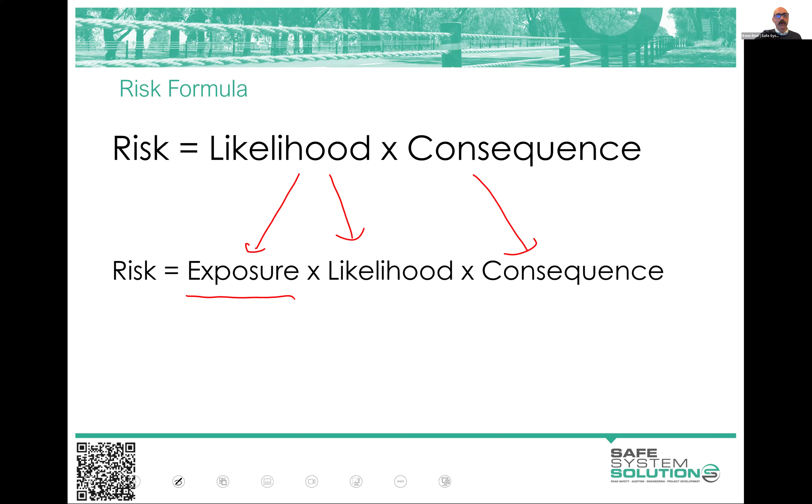But in this safe system assessment methodology, which is to a degree a particular risk assessment methodology, it's the extraction of exposure out, and then likelihood, and then severity or consequence. So how many people are exposed to a particular crash type? What's the chance that crash type actually transpires? And what's the severity of injury we expect associated with that?

So really a safe system assessment, a big component of it is doing some quantitative analysis of exposure and likelihood and severity, and then multiplying them out.

When we start to think about treatments we could put into the road and roadside environment or the street environment to alter some of these things, exposure is about changing the number of people exposed to a certain crash type. It could be restricting the number of vehicles that can go through an area, changing the number of people crossing at a crossing point, or whatever it is like that.

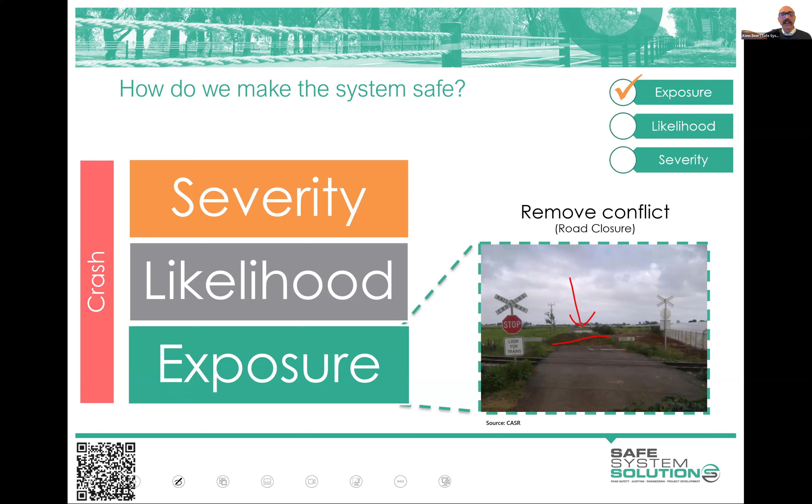You can see this one I showed, there was a level crossing, which has a mound of dirt and a road closed sign on the other side. That's eliminated the exposure to that crash. The separation of vulnerable road users from vehicles changes or removes the exposure to crashes with vehicles.

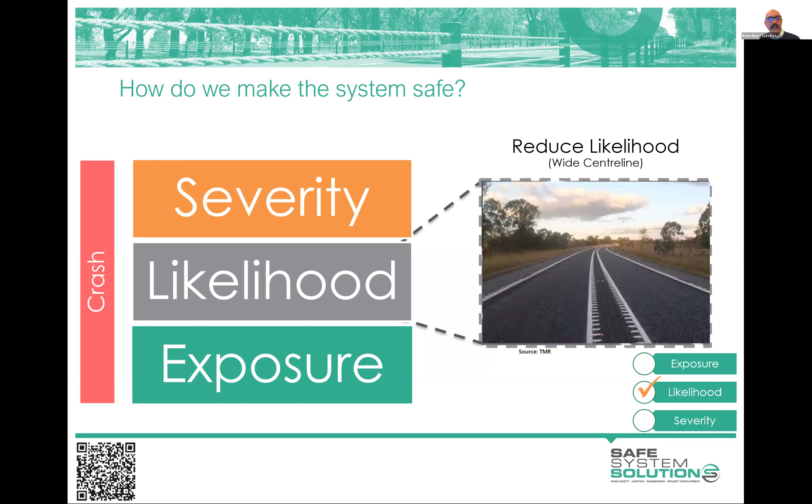The likelihood - things that reduce the likelihood, we've been doing many of those for a long time in road safety. Those are things like the geometric alignment of a road, the presence of signs and lines to warn and inform and guide, the surface we provide, sealed shoulders, tactile edge lines, lighting, all those sort of things. They're trying to reduce the chance a crash happens.

Traffic signals in their own right are a likelihood reducing factor. So we know that you can still crash at high speed - people go through signalized intersections at high speeds with some pretty harsh angles, and we see the crashes happen.

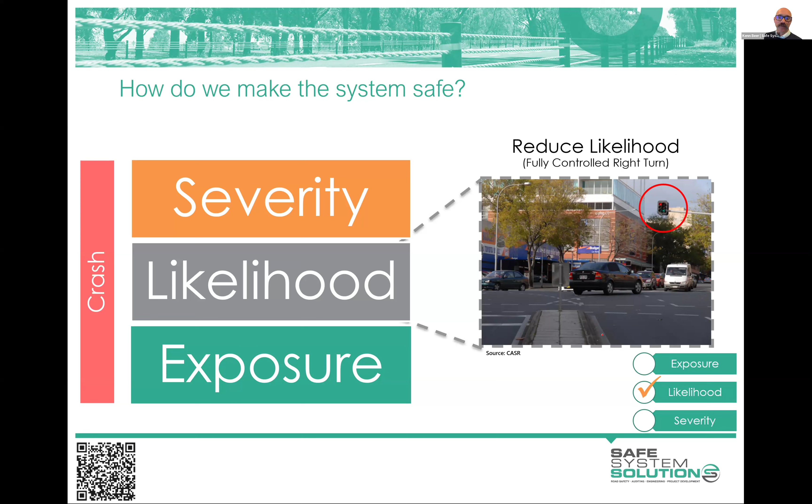The severity of crash can be altered by a fairly small handful of things. We've got the speed, we've got the levels of protection that are provided. So is it a vehicle - do they have crumple zones and the like - or is it a vulnerable road user who's less protected? Have we got padding and helmets and those sort of things? What's the angle the two vehicles crash at? So those are a few of the key things there.

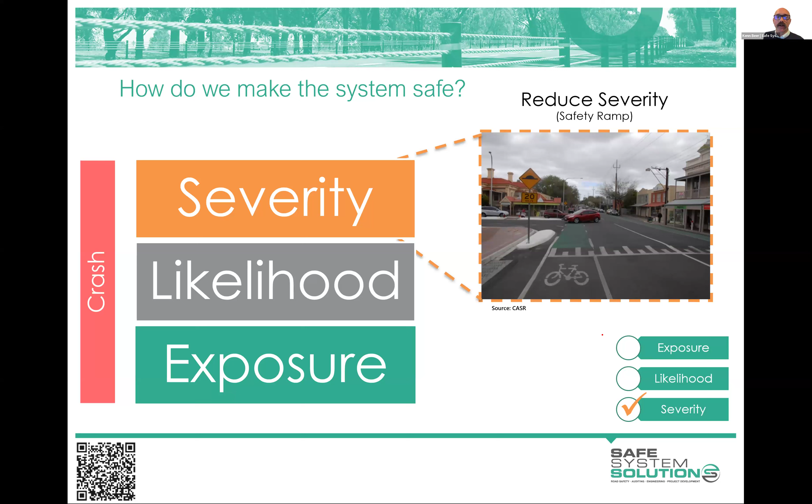Slowing vehicles at conflict points, improving angles - those are things that can alter the severity. And also thinking about how energy is dissipated in a crash or managed in a crash. A barrier system - it is a crash when you hit a barrier system, but the energy is dissipated as the vehicle slides along the system. That slow dissipation of energy is where we get these reductions in the severity.

But we add the barrier system in the middle, they're more likely to hit it. But the thing is the severity of any incident comes down so significantly, because that head-on is such a violent crash, and it's so likely to result in serious or fatal outcomes.

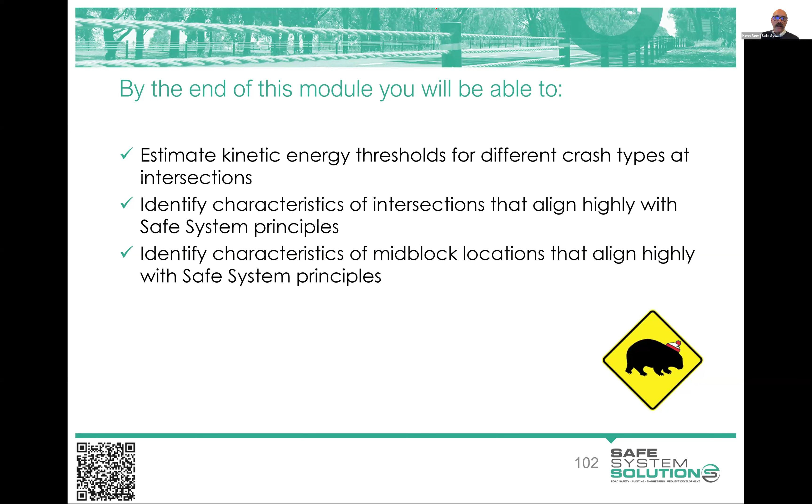Now, it's interesting when you analyze risk on a road network, there's quite a few tools you could use to do that, and safe system assessments are one of those. They have a particular purpose, but there are some more complicated tools - there's ANRAM, AusRAP, IRAP, IRR. You may have heard of some of those, you may not have, that's okay. They are essentially methodologies where you put inputs in and it spits out a risk score.

When you look at a length of road, usually, and this works either urban or rural, what you'll find is, if I draw over the top of this - if we've got risk here, and then we've got chainage here, so like length along a road - what you discover is that risk sort of bubbles along and then spikes. And of course, those spikes are the intersections.

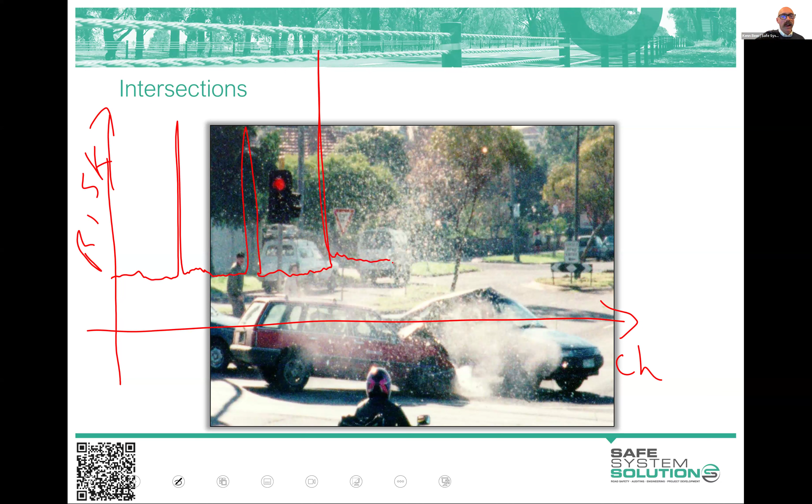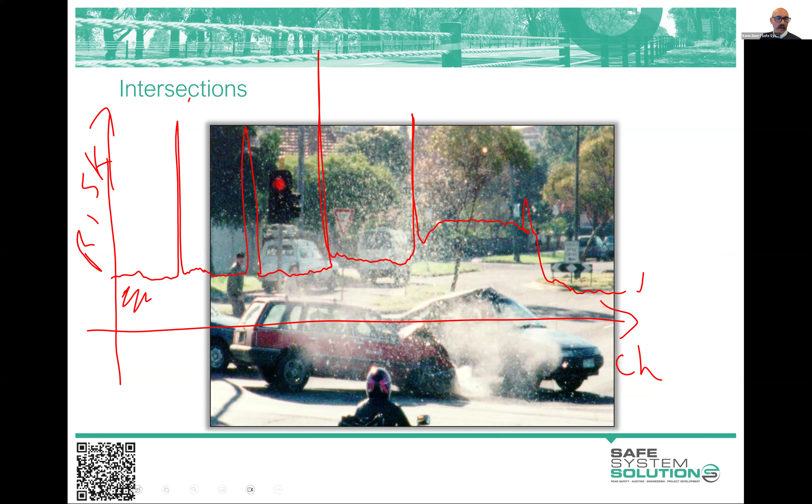And then, sometimes mid-blocks have worse characteristics. Sometimes things get better. But there's an underlying inherent risk, and we're going to talk about that a little bit later, of what we can do about that. But then these intersections spike as our points of highest risk on the network, but they're only at these isolated points.

So most people, when they think of that, they think just of this crash type that is happening. But actually, we see quite a variety of crash types at intersections. And then there's this interesting spot where, of course, in urban areas and some rural areas, we have pedestrians having to cross. So we've added that into the mix. We've got cyclists who are trying to get through there as well, and that adds a complexity.

But one that some people aren't quite aware of is that at a lot of intersections, we place point source hazards - either signals, signal pedestals, power poles. So we're running a power line along a road that has to turn down the road, well, the power pole then goes right at the intersection and the corner there. We have drainage culverts because water needs to get across this road that it's come across. So all of those present what we call point source hazards.

And we actually have an increased chance of a runoff road crash happening at an intersection as well, because there's so much turbulence happening at that intersection. And by that, I mean a vehicle may come out into the intersection at an inappropriate time or try to turn at an inappropriate time. And a driver approaching that will avoid, because if they're able to see it, people don't want to crash, so they try and get out of the way of that, thus leaving the road.

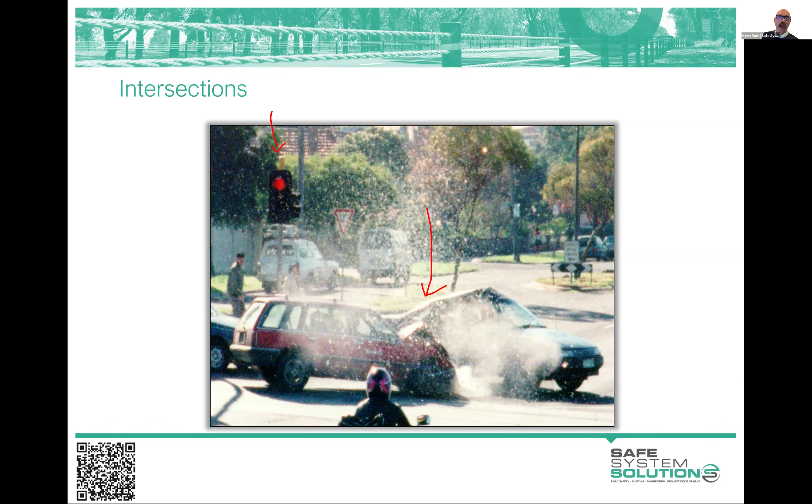Monash University Accident Research Centre, a while back, came up with some high-level principles on intersection design to try to get the best alignment with safe system principles. I'm not going to go through this in detail because I'd like to get you putting this in practice. But it's interesting, their first couple of principles were fewer vehicles and fewer intersections.

Well, that's actually reducing the exposure to crashes, isn't it? When I was talking about exposure, likelihood, and severity, that's really reducing the exposure to crashes. When we get into fewer conflict points per intersection, that is about the likelihood of crash.

Then we're also looking at speeds and angles, and that is about the severity of crash. So all of this is about the severity of crash. And then they've put in here those biomechanical tolerance levels that we talked about.

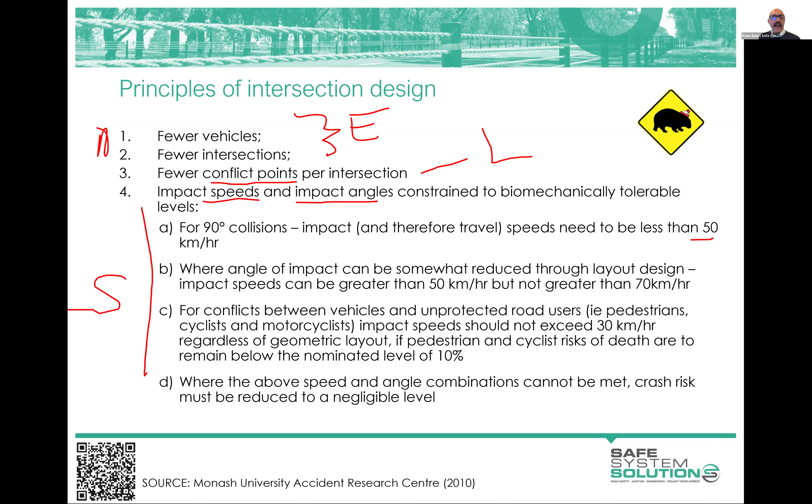So around the 50 kilometer per hour for that 90-degree crash. And then if you can get a little more angle on the crash, you're able to bounce off a bit. It's the old year 10 vectors, if you remember your physics - a crash, you bounce off a bit like that. So you're able to do that at a bit more speed, because what we're doing there is looking at delta V.

Delta V is the change in velocity in a crash. So there's less of a change in velocity in that crash angle than there is in that crash angle. Now, there's worse delta V in a head-on, but the reason we are able to get a bit more speed out of head-on crashes is that we have all of those features in the front of vehicles to absorb energy.

So we've got crumple zones, airbags, seatbelts. They're really quite well designed on that. So that's why you can get those extra advantages.

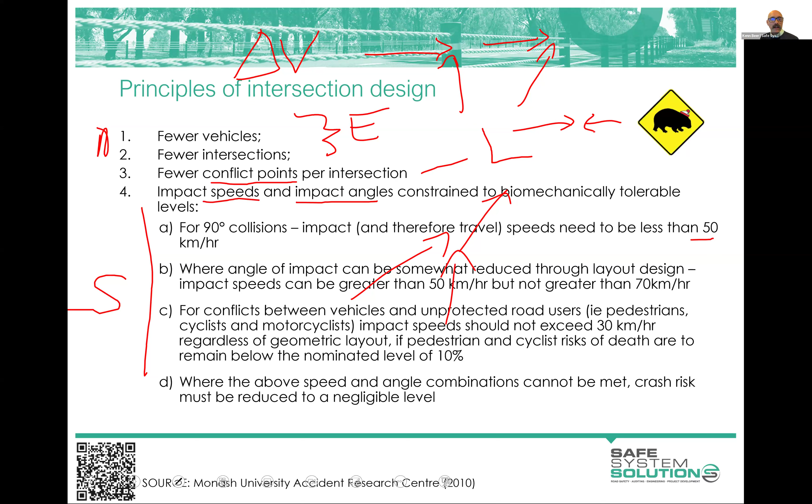You'd see there that we're thinking about vulnerable road users, and if they're possibly in and around the intersection, we're trying to get speeds around that 30 kilometers an hour. So that's the sort of high-level theory of it. I've popped down this table in there to summarize a bit of that thinking.

They've used something here called KEMM-X, which is the kinetic energy management model. That's far, far more detailed than you would need to do in a safe system assessment. And in a safe system assessment, we're

generally thinking about, okay, what are the crashes that will happen? What are the types of crashes, about what speeds are they going to happen at, and about what are the tolerances generally for those speeds.

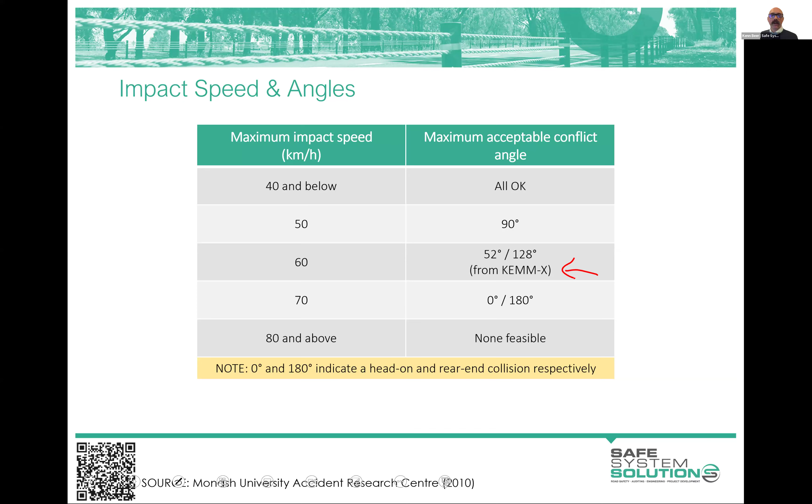So you might see that they're proposing a new intersection like this, and you would say, okay, right - you don't need to be this precise, really. In CAD, it's pretty easy to spit out these angles, but instead of 104, you'd basically say, well, that's kind of a right angle crash, isn't it? I'm going to do this in a different color.

Might stand out a bit more. That's sort of a right angle crash. And we just talked about a right angle crash for passenger vehicles. We're thinking, okay, we want to ensure that that's around the 50 kilometers per hour or below.

When they crash over here, we've got a bit more angle on that, don't we? So for that one, we could probably go 60 kilometers per hour or below. So you can see you're thinking about the angles and relating them to speed.

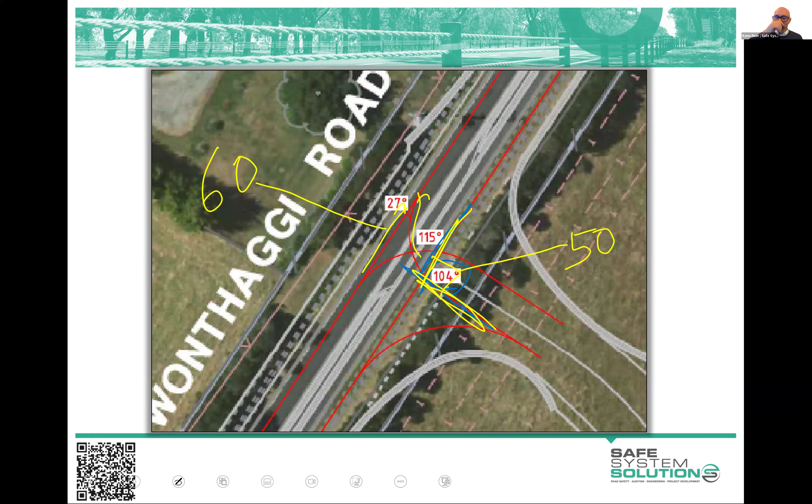Now that's just vehicle to vehicle crashes. If we were talking about pedestrians crossing this side road here, for example, well, then we'd be saying pedestrian - we want to ensure that's 30 or below. Now, this is the severity of the incident.

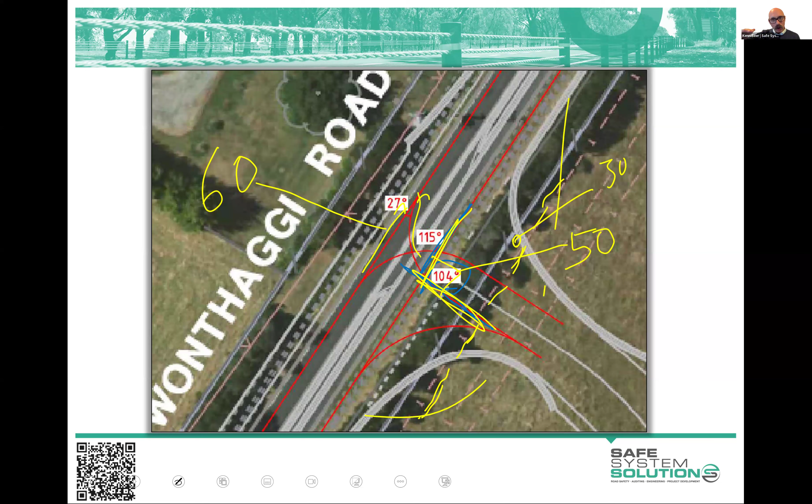We're, of course, going to do everything we can to minimize the likelihood of it. We're going to have good sight distance. We're going to have controls in place if we need. But we really always think about, okay, this incident is going to happen - what road users are involved, what's the type of crash, the angle of crash, and what are our tolerable sort of speeds?

Well, so you probably want to have a think about secondary crash impacts. This is a little bit of work that was done by the Centre for Automotive Safety Research at the University of Adelaide, just replotting vehicles that have been involved in lots of crashes at intersections onto the one axis to see where your secondary

death and serious injury occurs. And it's fairly obvious. I don't know whether the research was required, but it's an interesting sort of way of presenting it.

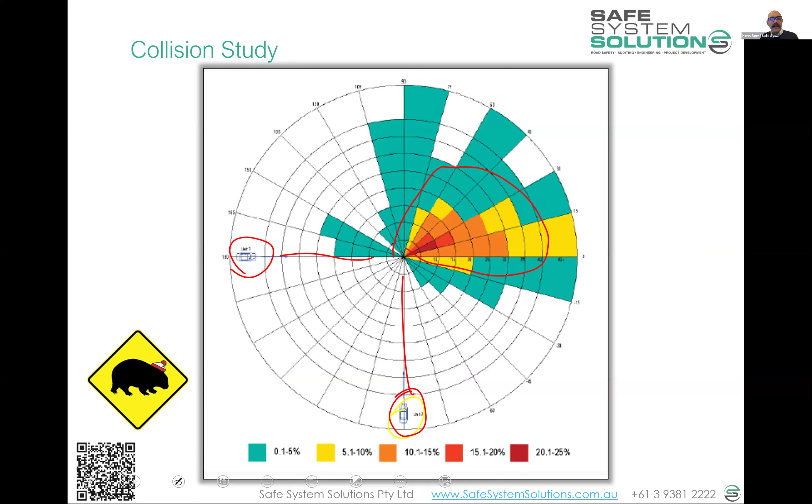Okay, I think it's time now for you to do a little bit of work. I'm going to give you a good bit of time, maybe 10 minutes or so, because this is going to be the start of your practice categorizing into exposure, likelihood, and severity.

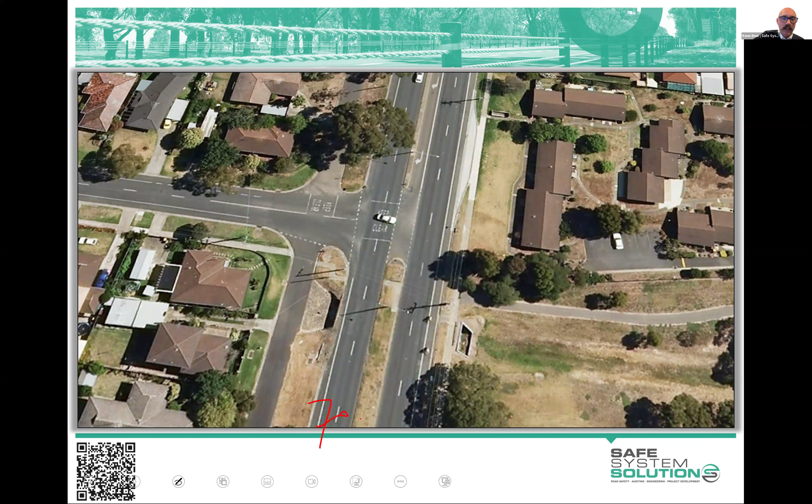So this is an arterial highway with a 70 kilometer per hour speed limit. This is a major local collector road with a 50 kilometer per hour speed limit. It has about 3,500 vehicles a day, while the arterial highway has about 23,000 vehicles a day.

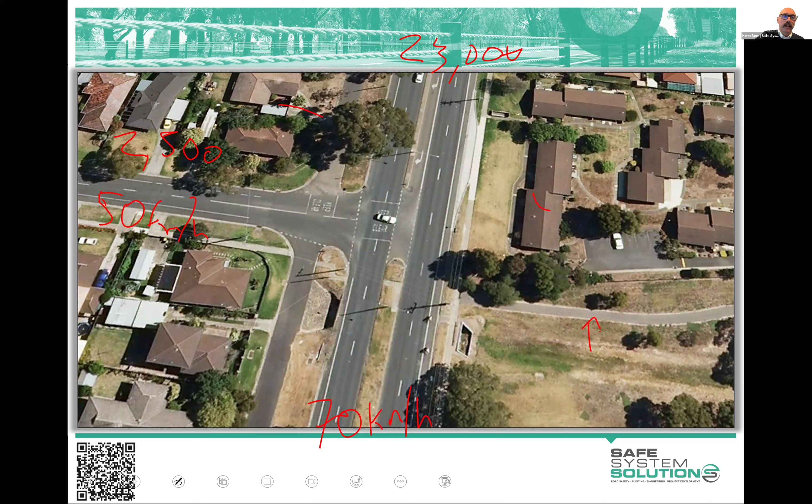This is a shared use path here. It's residential areas all around. This is a bus stop, it's a bus route. You can see it's a passively controlled intersection, meaning it's controlled with a give way sign. These are two-way service roads, just making it so people can access their properties, and they've got ways to get in and out further up.

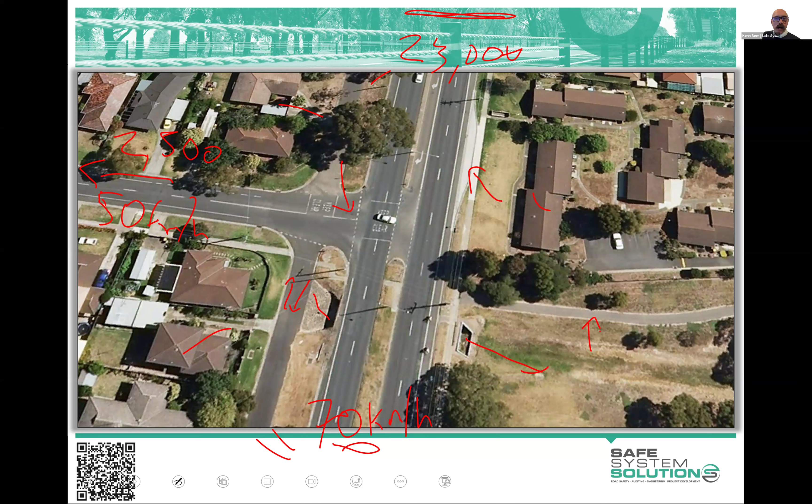This is like a drain, like a culvert, drains water out there. What else can I tell you? About 300 meters up the road is a set of traffic signals, and about a kilometer down the road, maybe a little more, there's another set. Down this road here, maybe 300 to 400 meters, is a big school, primary and secondary. So that's a bit of information about it.

Let's just have a look from ground level. You can see there's the side road, a vehicle coming out. It's got some lighting, that's the bus stop I mentioned. Two lanes in each direction on the highway. Looking from the other direction there, that's the shared use path over there, and that's the drain structure thing.

Okay, so that's the scenario, and I'll welcome anybody who wants to ask questions about that as we go, just pop them in the chat as you usually do. But your task is the removal of fatal and serious injuries at this location.

I'm going to give you a budget of 3. I'm going to make it 4 - inflation, eh? I'm going to give you 4 million now. You've got 4 million dollars.

You can't close the intersection. I know you thought, okay, well that might certainly alleviate intersection crashes if there is no intersection. But we've consulted, and the vehicles have to be able to enter and exit and go both directions and enter from both directions.

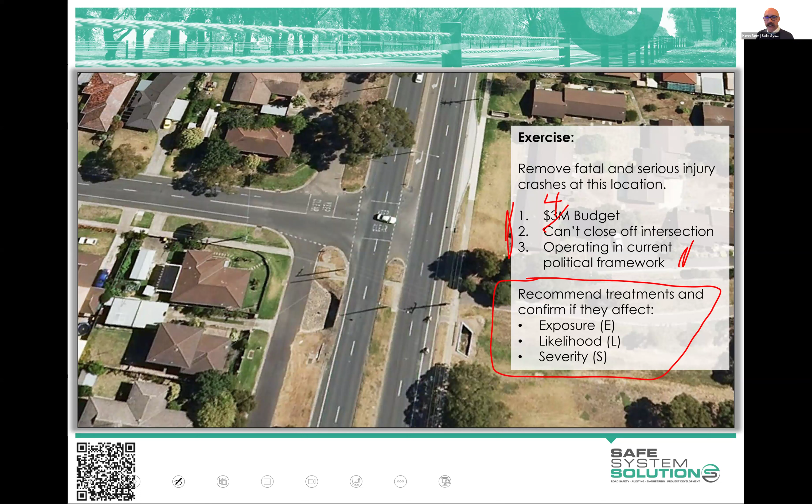So take, for example, maybe you say we'll improve the lighting at the intersection. Odd thing for you to say because you haven't seen it at night and there are lights there, but okay, let's improve the lighting. That would, and then you'd put in brackets after that 'L', because that's going to reduce the likelihood of crashes.

Now a couple more things. Oh yeah, good, Loretta's put the example there. I love it. Some of you may be saying, well, I don't know how much things cost. Like 4 million dollars sounds like a lot to me. I don't know what I could do.

Well, what I can do for you is be an instant cost estimator. So if you want to know the cost of something, just type it in and put 'cost?' and I will tell you a cost for it. Now I see somebody's already jumping in there, rolling the sleeves up and getting in, but they haven't told me whether it influences exposure, likelihood, or severity.

So, have a think about that. Now, as I say, I'm going to give you a good 7 or so minutes to think about it.

Jot a few dot points in. You can do more than one thing, you can alter things, but I want each particular element for you to say whether it influences exposure, likelihood, or severity.

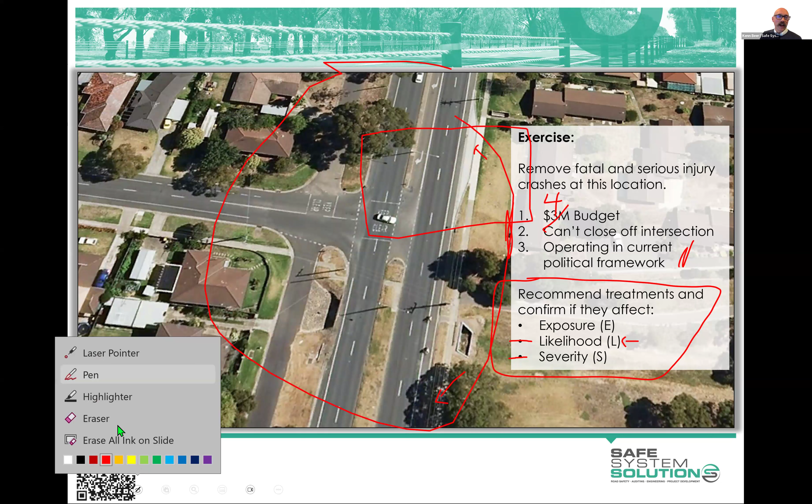Okay, and that's an interesting one. People saying, okay, let's move the bus stop, maybe down here or wherever they've decided to move it. Is that going to influence the exposure, the likelihood, or severity? At a very isolated assessment, it would reduce the exposure because there's nobody exposed there. But we're thinking about the whole intersection, aren't we? So we've relocated it, made it a safer spot, less chance of crash - so it's predominantly going to be the likelihood. It's a bit hard to say it will eliminate exposure, because the bus still has to enter back in and the pedestrians getting off the bus still have to cross.

Roundabout. Good. Okay, I'm just skipping through here. Some interest in trying to figure out how we can maybe get a roundabout in within our budget.

And then Suvay right at the end there is talking about the possibility of a raised safety platform, which would possibly reduce the severity of crash. I really liked that - I liked the fact that we had lots of variety and some good goes at categorization.

I'm going to talk about some of those with a few slides, and I'll refer back to some of those points. But a lot of you said traffic signals, and I can understand why. I think we've got a good bit of experience in the virtual room here of people saying, oh, unbalanced flow, it's a major arterial, it's got signals up and down from it. You know, it's looking like signals might work well.

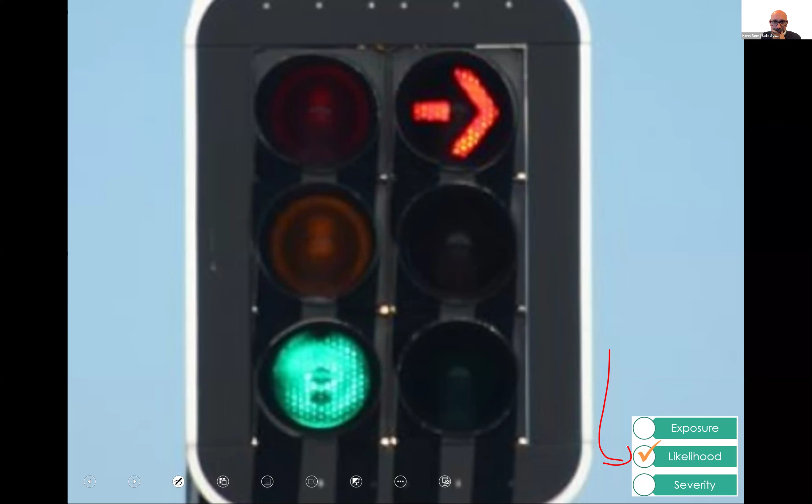But the idea that a set of traffic signals is safe is just false, right? When you have these speeds, roads of 60, 70, 80 kilometers an hour, people just run the red lights and we're left with hugely severe outcomes.

And if you were to filter the top 100 spots for death and serious injury in any major city in Australia and New Zealand, the signalized intersections are going to dominate the top 100. Yeah, there'll be a few others, but that's it.

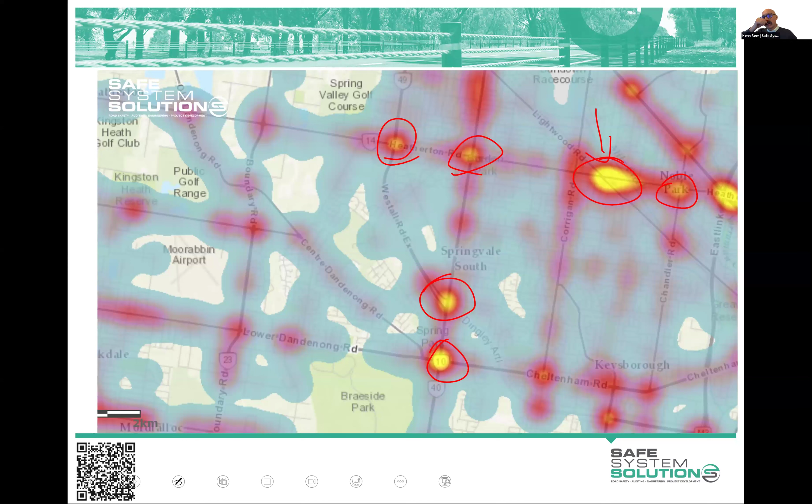And it's still a huge hotspot of death and serious injury. So we need to rethink how we are operating those environments. We will not eliminate death and serious injury with those approaches. I'll come back to that in a bit, and I might dig into my archives and show you something else shortly.

Roundabouts. Some people were trying to get a roundabout in there, and a roundabout has some really wonderful advantages in the sense that it reduces the severity of crash and to a degree the likelihood. So we have some crash types go down in terms of less conflict points and a few other things.

The other thing, a couple more things on roundabouts, is they don't perform that well when you have unbalanced flow. So if you have a big major road meeting a minor road, the roundabouts don't perform that well.

You can do things to manage that. You can meter them, for example, and metering involves sort of signalizing just one leg. That way, when the queue of vehicles extends and extends, you can have a loop in the ground that triggers, stops vehicles here, flushes some of these out, and they can go.

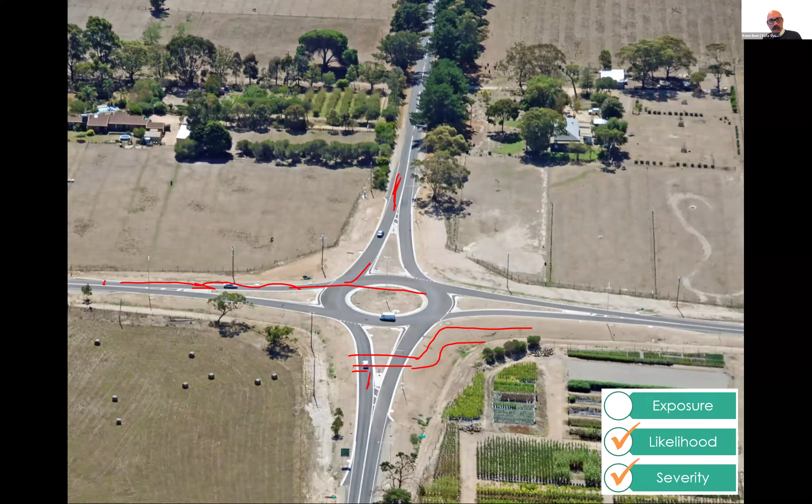And that is a disruption of ultimate priority. What I mean by that is that a vehicle approaching here does not necessarily think they have right of way. Same with a vehicle approaching here or a vehicle approaching here. So that can be a really beneficial thing.

When we have just a major priority road and a minor road, the major priority road vehicles just continue at speed, same alertness generally. We haven't changed and disrupted that. Signals will do the same, even if it's a red light or a green light, they're just going, and they'll go through at speed and continue through. It's a real point of high risk.

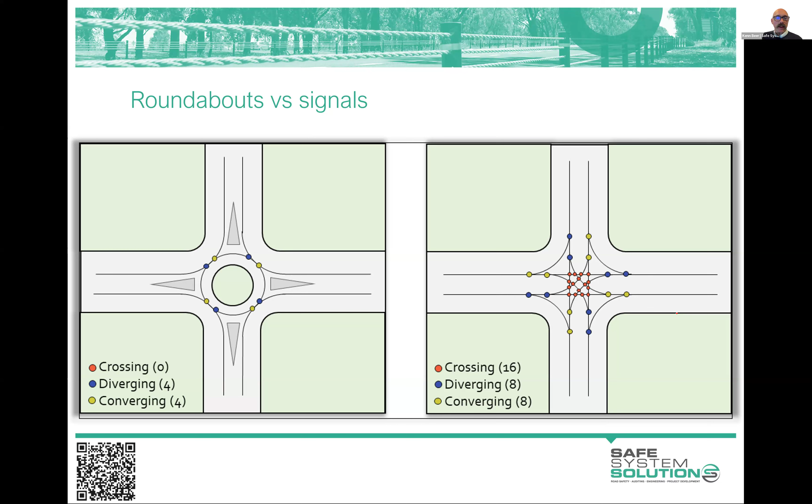The angle of crash is better. Certainly there's lots of different angles you can crash at a signalized intersection, but some of them are pretty bad. At a roundabout, you really find you are crashing at these better angles.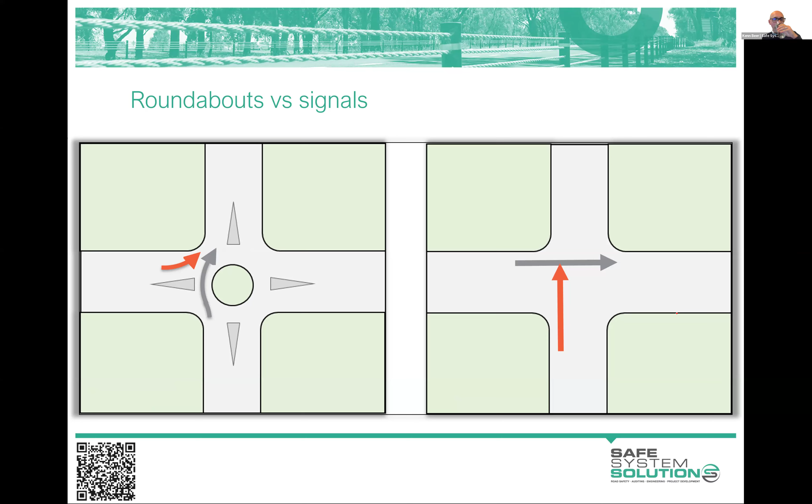This one is talking about that disruption of priority, but drivers unfortunately drive in all states of consciousness. We'd love them all to be alert and awake, had a cup of coffee and a big night's rest, and be completely sober. Unfortunately, it's just a real mixed bag out there. We've got people who've worked a double shift driving to their sister's wedding, people who've had a couple of beers, people thinking about the fight they had with their partner, people being distracted by kids in the back - all sorts of stuff going on in the vehicle.

So if we're able to really engage the driver in the driving task at points of higher risk, that's great. Again, I stress, we would love them to be really on task the whole time and really alert, but we've got to be a bit more understanding of who we're designing for here.

A roundabout, a big lump of infrastructure in the middle of the road, or a roundabout just the setup of it, it invigorates to a degree the driver. It makes them interact with the driving task - wake up, look around, slow down. It's just huge wins in terms of the management of risk.

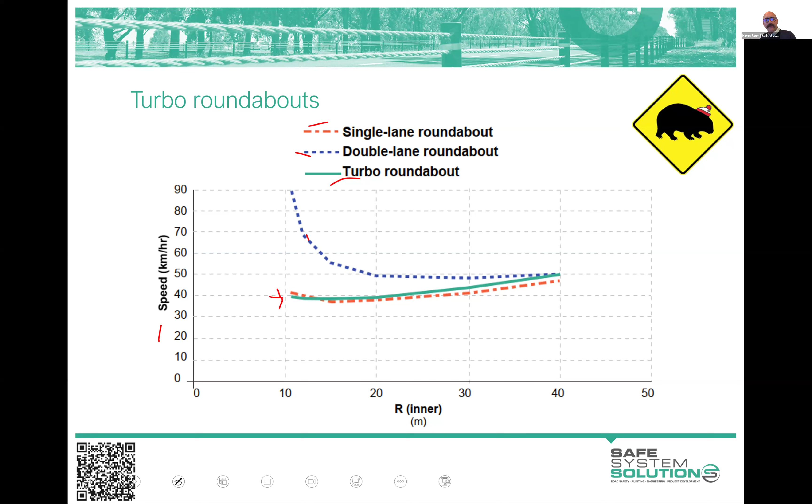Turbo roundabouts, they're two-lane roundabouts. They perform pretty much as well as a single-lane roundabout. I think they're an interesting little case study, partly just for your interest, but also partly to think about - okay, there's stuff we can do to enhance safety here. These are turbo roundabouts, so essentially they've got a raised separator between approach lanes. They've got a raised separator in the circulating carriageway. They're essentially creating channelized turn movements throughout the roundabout.

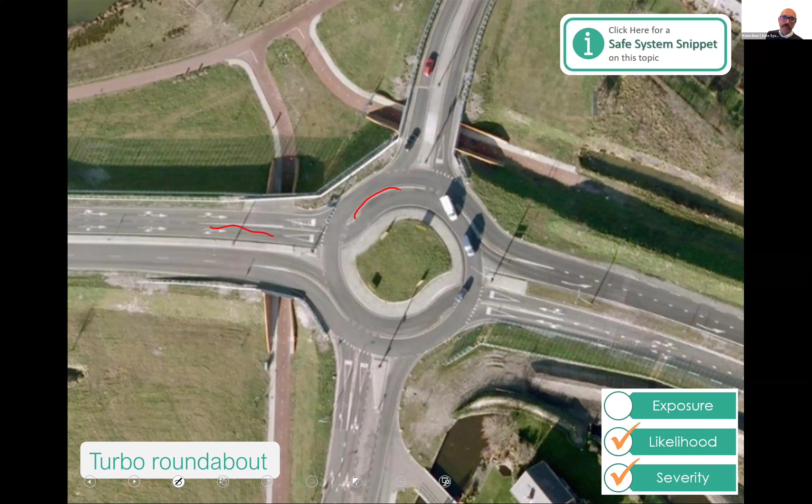Here's another one. So you see that raised separator, and you see that raised separator. And so they get us sort of the same safety performance of a two-lane roundabout and one-lane roundabout.

I like this photo actually. I like the fact that we've got a truck here that's entering into the intersection. We've got a vehicle approaching here. Somebody's made a mistake - looks like the truck driver may have made a mistake. But we just know that that's going to be an okay outcome, even if they crash. There's no way this white van can be going at super high speed.

Okay, this is obviously a very European roundabout. It's got a very radial roundabout design - you can see how it goes in. And Australia often does a tangential roundabout design, which is going to have slightly higher speeds. But so it's going to be going slowish. The angle of crash - look at that. It's beautiful and bouncing off.

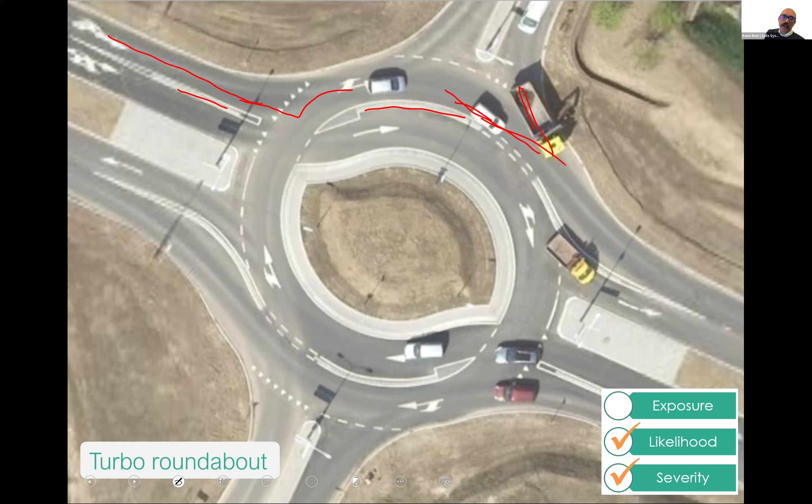And look at this one, eh? This is a turbo roundabout in the Netherlands. We had a Dutch engineer we'd brought out to do some work on cyclists at roundabouts and the best ways to design roundabouts to improve cyclist safety. And I showed the Dutch engineer this - I'd never been to this one - and I said, 'This is incredible, it just boggles my mind.' And we talked about it for a while and how it functions.

And I see Natalie's popped in a question, and I'll give a prize to Natalie for that, asking about signalized roundabouts, because this is a signalized roundabout - I mean, it's a turbo roundabout, it's signalized. But yeah, it's just amazing in the sense that you go, wow, okay, look at the land take on that. Look at the sort of complexity of it. I dare say if you're on the ground, it would be more obvious where you go and what to do and those sort of things.

But we're sort of talking about speeds and volumes and those sorts of things.

I said, those types of roads and those volumes in Australia, that'd be a large signalized intersection out in your outer suburbs, growth areas. And the Dutch engineers just could not fathom that we would kill and seriously injure that many of our community.

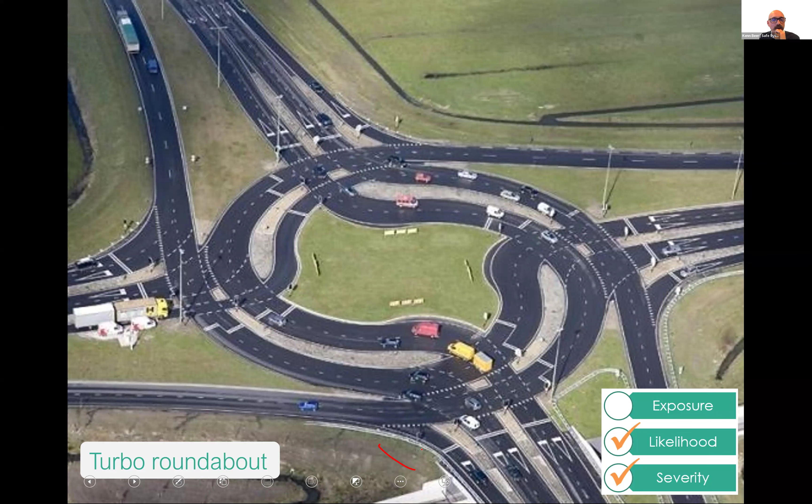But it's nice to see that we're starting to recognize this, and people are starting to try to come up with designs of large signalized intersections that start to address some of the inherent failures that they have.

And I love the fact that people are now doing it, and we can start to say, okay, now we've got a large signalized intersection, but we've done something to address the severity of crashes. And that's going to be the critical thing. We really need to start addressing the severity of crash outcome.

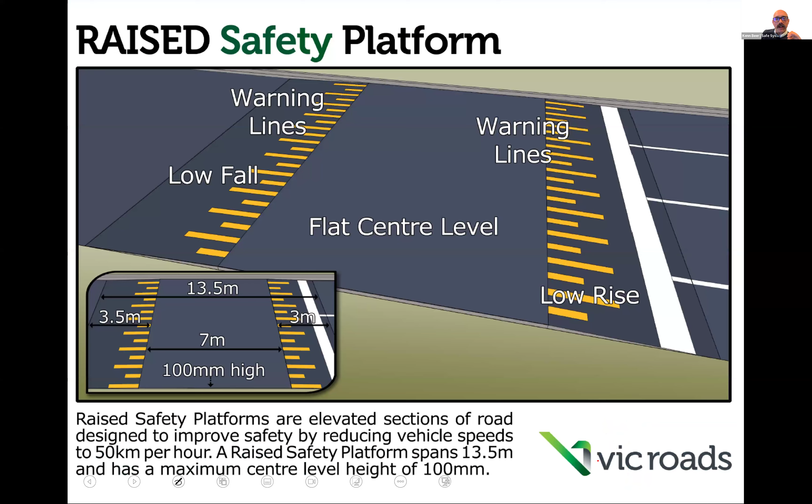It's interesting, right at the end, talked about, well, what about some sort of raised safety platform? Something to try to slow the vehicles. And at that one that you were looking at, in the end, the region went through a lot of the thinking that you did very quickly. Your quick thinkers, but they took a long time to ponder and say, well, like a roundabout, but it's going to cost a huge amount, and pedestrian crossings aren't going to be great, and it's unbalanced flow.

They ended up saying, yeah, I think signalization is where we're going to go, but are we willing to just build another set of traffic signals when we know our top 95 of the 100 death and serious injury in our area are traffic signals? Are we really willing to just build another one and hope for the best? Yeah, we will reduce risk, and they're right on that, but could we do better?

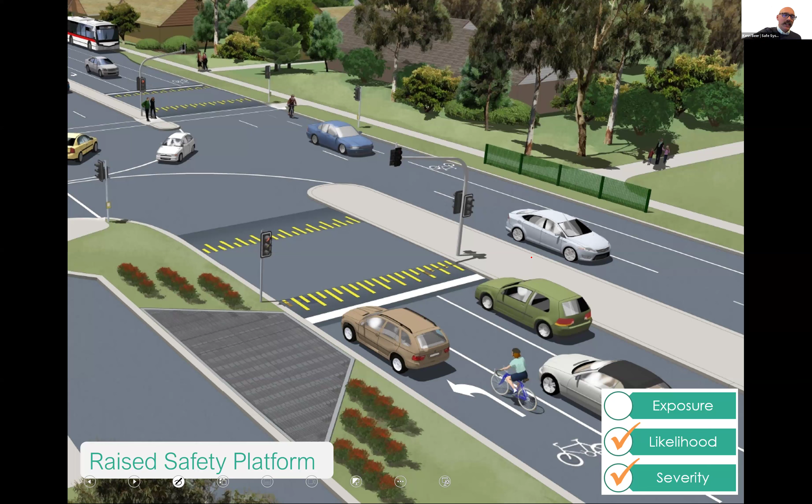Safe system assessments sort of get involved in this and show that things could be done better. And they went with these raised safety platforms on those two approaches. Now, why not raise the whole intersection? Well, you don't need to. These are the vehicles that do the damage, the bullet vehicles. The vehicles coming in and going out do not have the speed to do the damage in those particular crash types.

Now, these aren't like urban speed humps like you would see in the residential back streets. These are shallower. They're there to try to just calm speeds down, to alert the driver, to activate the driver in the driving task. And with the addition of that, we see the severity reduced and we see the likelihood reduced. The likelihood predominantly from the signalization, the severity from that reduction in speed we see.

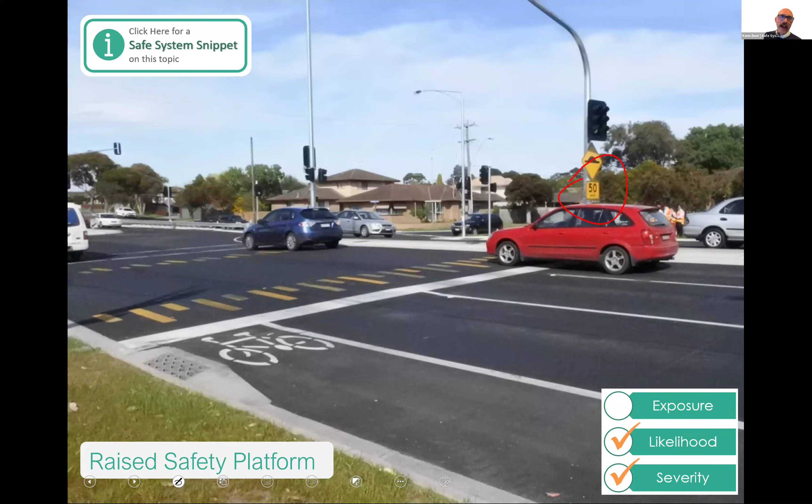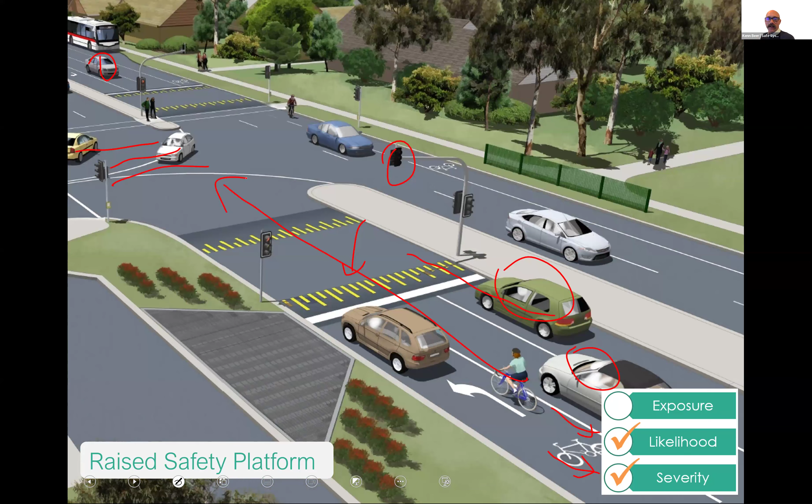And so that's out there. Now that's an interesting one. I was out there with a colleague, we were doing the post-opening road safety audit. Here's a photo we took while we were out there, and I sort of love this photo. I really got to blow it up and put it on my wall. Not because it's a high quality photo, but it's not bad actually. It's because of this.

That's a really interesting change in our industry that we're trying to move along. And it goes to the core of safe system, really: mistakes will happen, we've got to minimize the severity when they do.

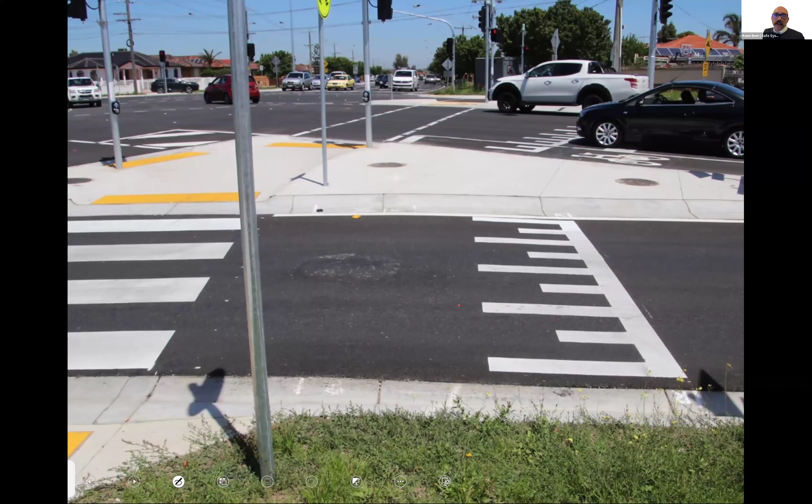It's good to see that lots of these raised safety platforms at signalized intersections are now going in. This one's a crossroad, so they raised the entire intersection because they could have vehicles from any direction. This one carries 54,000 vehicles a day on one leg and 29,000 on the other - a massive intersection. One thing that makes me really happy about this one is that it used to be a roundabout, and they removed the roundabout to replace it with traffic signals, which is something that has been going on for a long time.

I'm going to give you a break now because I'm going to dig something out of my archives, and I'll tell you a little story about that removal of roundabouts replaced with traffic signals and why this one makes me so happy - I was so frustrated at some different points in time.

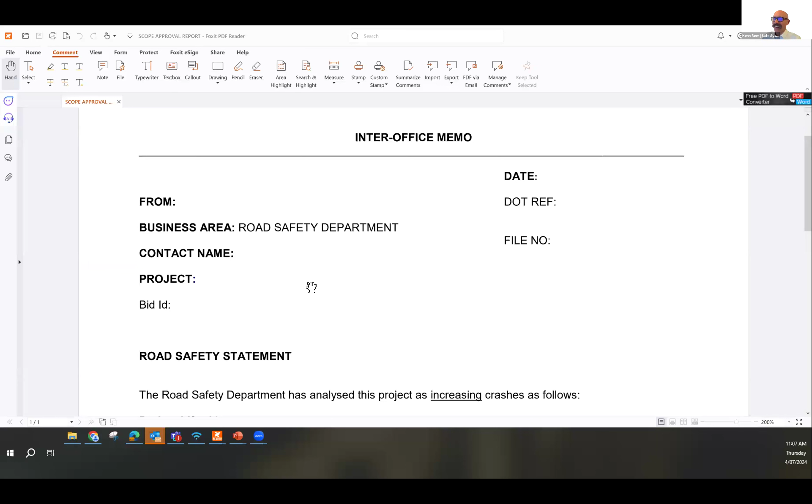Let me explain the background. I was in the government, and the government had announced a huge congestion easing project at the time - I think it was Australia's biggest ever congestion easing project, called Keep Melbourne Moving. They analyzed all of these areas to figure out how to improve traffic flow. So the traffic engineers went off and did that. I was in the road safety department, and they came up with their concepts and designs, which had all been traffic modeled and everything like that.

They had to go through the road safety department for a review, and then off they'd go. They were expecting us to review them for things like whether the phasing was right and the appropriate warning signs. Well, we did that detailed review and the bits and pieces. But we also started putting memos on top, because a lot of them involved removing a roundabout to replace it with traffic signals, because you get better traffic flow - there's no doubt about that for cars.

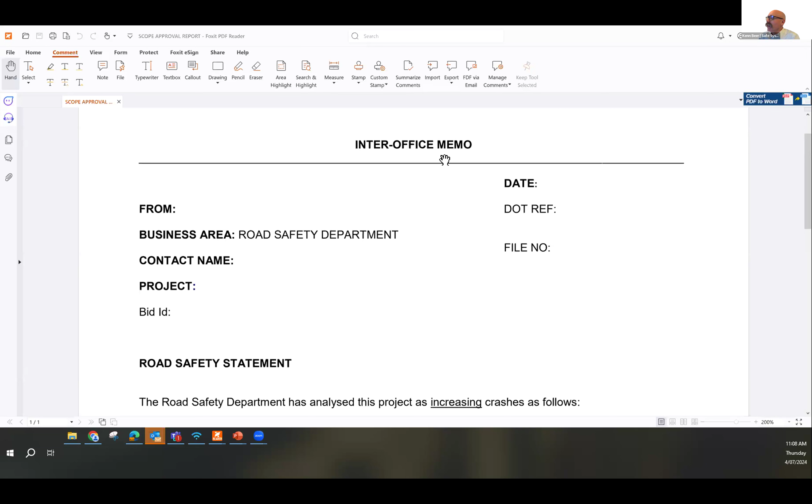So I took a copy of the template of the memo from the road safety department. So here we go: Road safety statement.

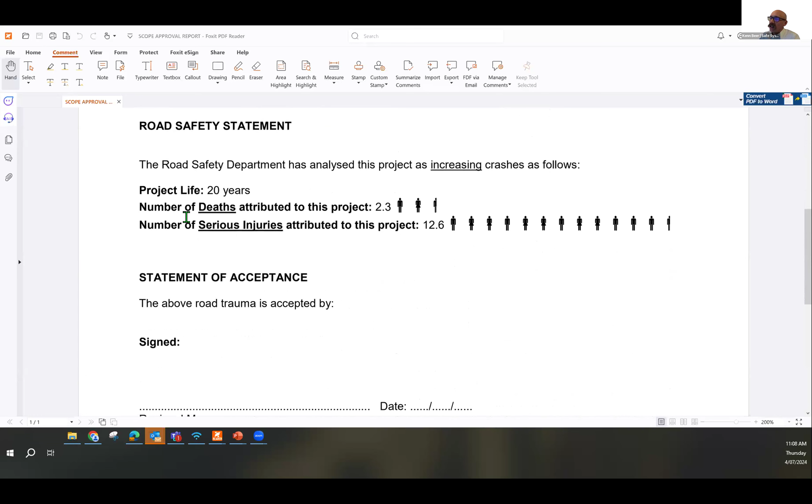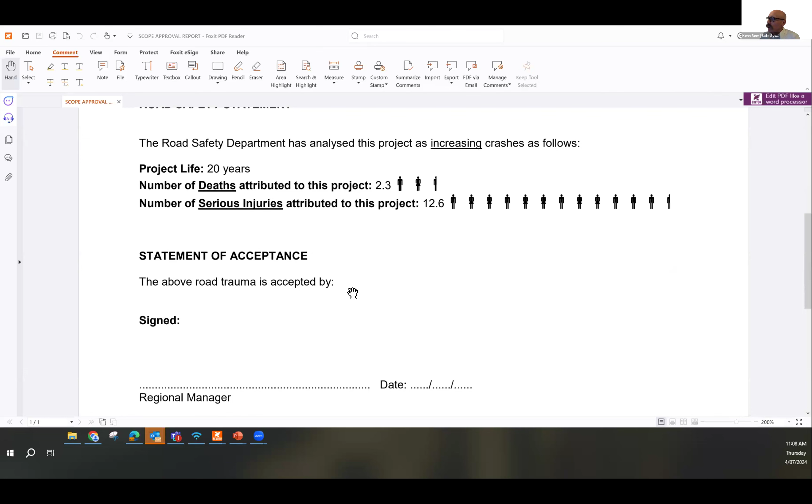The road safety department has analysed this project as increasing crashes as follows. Project life: 20 years, you need to put a project life on it. Number of deaths attributed to this project: 2.3. Number of serious injuries attributed to this project: 12.6. Put little pictures of people to remind them we're going to kill and seriously injure some people here. And then a statement of acceptance: the above is accepted by - I left it for the regional manager. So that would go on top of the projects and they'd be sent back.

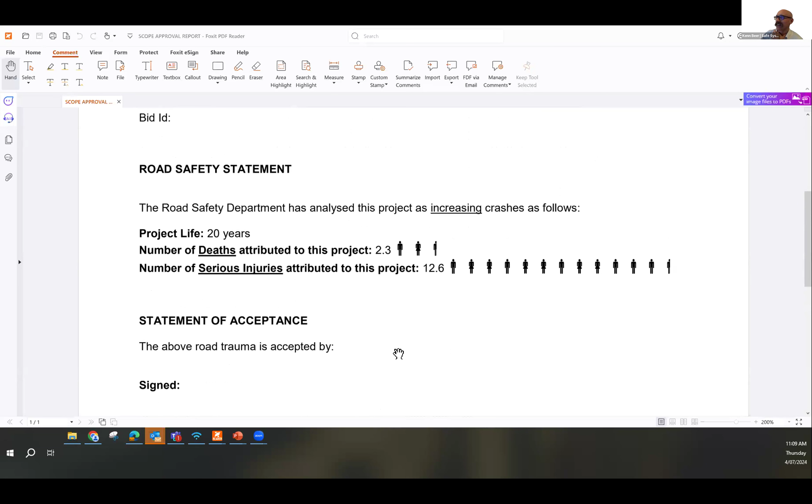Well, did that cause some issues? Yes, it certainly did. Was I, myself and my colleague who were doing this, told to immediately stop that? Yes, we were. The typical things came out - managing a road system is complicated, you need to balance many different things. Nobody would question the actual numbers we put up, because everybody generally agreed, yes, that is going to kill more people and seriously injure more people. You kind of need to sometimes strip it down to make that call and somebody own it.

Anyway, coming back to what was showing before - that intersection - a good 10 years after that program I was showing you the memo from, there was another big congestion-easing project, and lo and behold they were pulling out roundabouts and replacing with traffic signals. But by that time, safe system assessments had become part of mandated practice in Victoria, and each one was subject to that safe system assessment. So the safe system assessments were doing the work that memo was doing, in a much more acceptable and palatable way, suggesting features like raised intersections to manage speeds now that we're going to get rid of that big feature that manages speeds through horizontal deflection - being the roundabout.

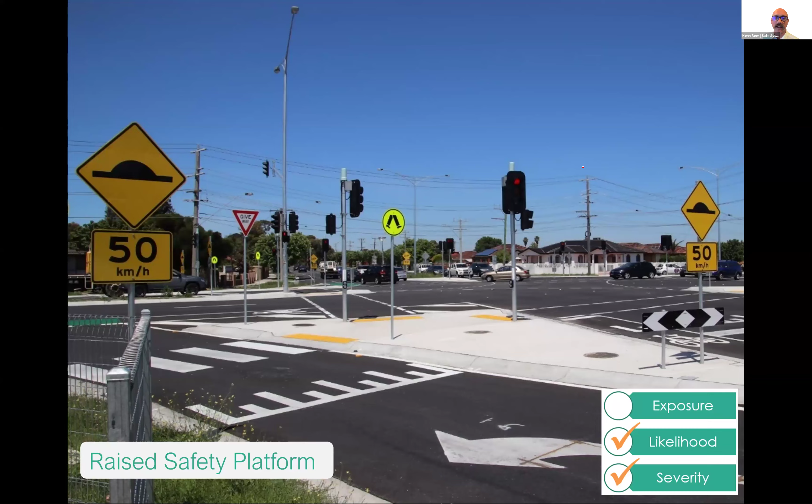So there's good guidance out on raised safety platforms these days. The Victorian government has some pretty good stuff - Road Design Note 0307 is a good one if you're interested, that's available online. Austroads has a document on the effectiveness and implementation of raised safety platforms, which is again a good one. On the front cover there's a New Zealand example down in Hamilton - they're starting to roll these out now. That's been a general theme - at least people are understanding that high-speed signalized intersections don't have great alignment with safe system principles, and we can do more, and we must do more.

So questions come in around pedestrian risk at roundabouts, and as I mentioned, we're going to talk about that in the next session, which is dedicated to pedestrian, cyclist and motorcycle safety - roundabouts and pedestrians are a focus of part of that. There is increased risk for pedestrians at roundabouts, however, signalized intersections with high speeds are still not safe for pedestrians either. So it's not like putting in a signalized intersection alleviates the road safety issues. Pedestrians like it more, they feel safer, more comfortable, but we still have that errant high-speed vehicle coming through.

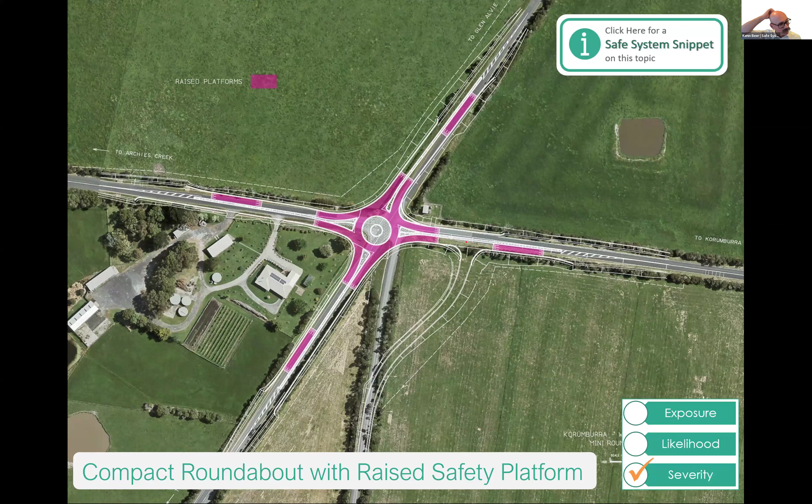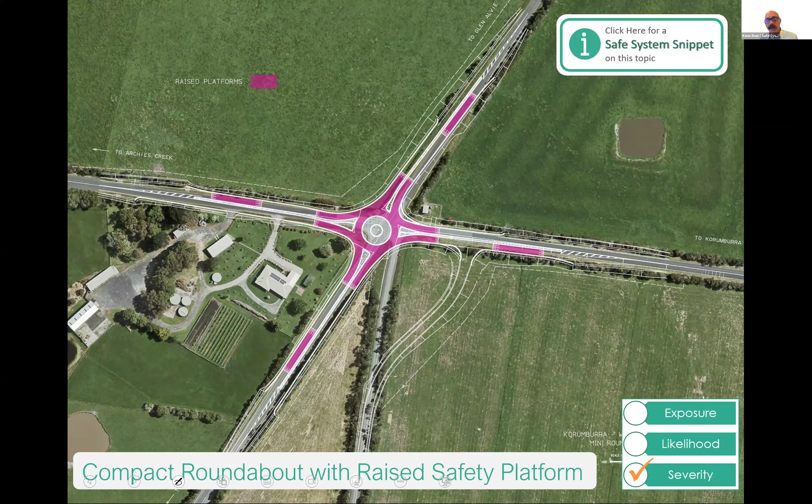Just another one I thought I'd show you. We were talking before about roundabouts, their size and cost. This was an interesting one for those worried about the cost of some of these big roundabouts. This is the arterial road through there, and before that is a telecommunications exchange building - the property lines are right up to the road, so there were huge challenges on acquisition. But as somebody pointed out before, they went with a compact roundabout approach, and it's really an interesting design because the roundabout itself is actually just that little middle bit - the bit around the outside is a concrete apron, so a large vehicle can track over that.

So it gives you an ability to make it much smaller. They didn't use reverse curves on the approach, and they tried some shallow raised platforms again. So really reduced cost - about half the cost of what a full-size roundabout was estimated to cost.

There's a bit of drone footage of it. You can see it's got a shallow platform, and a very small little island in the middle. Yeah, it's an interesting design approach.

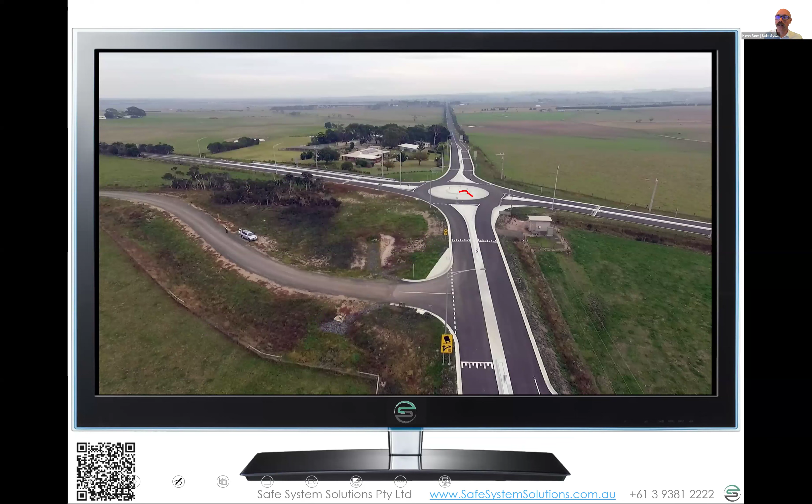We've written some compact roundabout road design guidance, which is on the Victorian government's website if anybody's interested, or you could email me, because there's a lot of technical design detail in how you actually do this sort of stuff. At the high level, it all looks good, but it can get pretty problematic, as many of you would understand.

I think there's a little pop-up quiz that Loretta might throw up there just as we do a little bit of thinking, and I'll just have a read of a question that's come in, or a comment.

The question is true or false: traffic signals are not safe system. True, false, or unintelligible question, meaning that doesn't make sense - what are you talking about? Write your question again, Ken.

And well, let's have a little bit of think about that. I'll just talk to Penelope's really good question in there, a good point around that sort of cost of maintenance, construction versus health, death, serious injury.

I was just over in the US at a conference. I was doing the opening presentation at the conference, and I did that sort of link back to construction of a high-rise building or something like that. There is no debate around things like adding rails to the balconies. It's not a cost trade-off with human health. It is that must be there. We need to start to take that attitude into our safety devices.

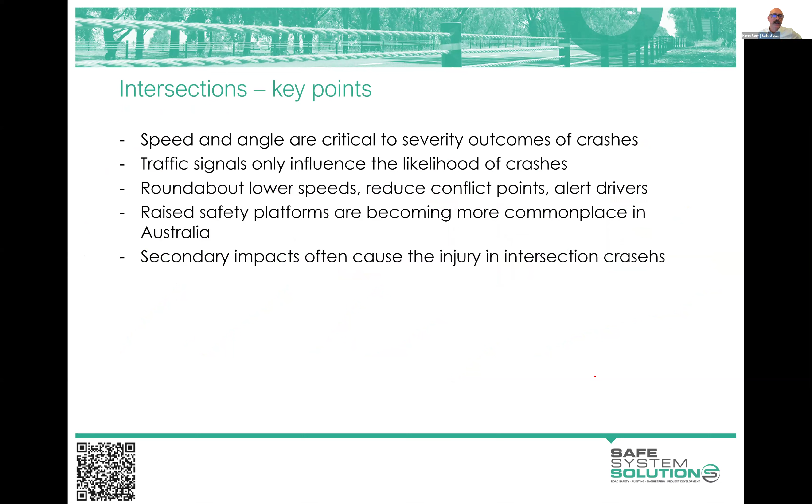So again, a few little summary points on intersections. They're in your notes, the PDF you can download. That was just a summary.

Now we want to talk about lane departure or mid-block crashes - head-ons, run-off road. I'm going to focus on vehicles today, and on Tuesday Max is going to really get into the cyclist and pedestrian components, and motorcycles as well.

When we have these long, fairly straight roads, separated by a center line, they've got a sealed shoulder, a bit of a clear zone, then trees and culverts. Without knowing the whole context of this road, apart from the fact it's 100 kilometers an hour, with occasional access points and side roads - what types of crashes do you think are killing and seriously injuring people here?

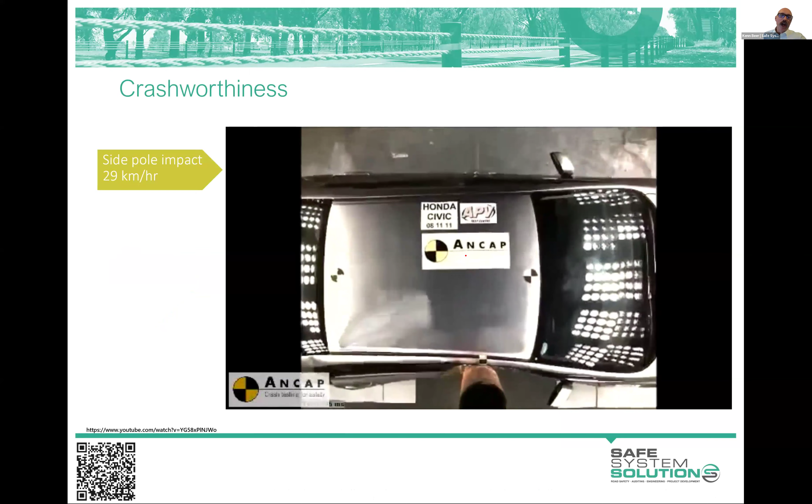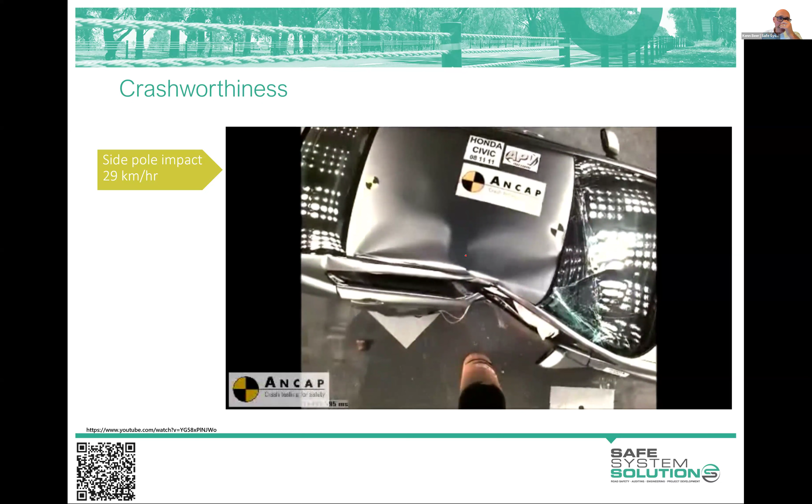Again, under a safe system, people will leave the road, they will leave their lane. How are we managing that?

And the idea of creating cleared areas in the roadside is problematic. It's problematic, one, because we don't really want to do that - it's often native vegetation, sometimes the only remnant vegetation left in an area. If you're trying to do that, you're going to pay massive offsets and other huge costs. Sometimes you just can't, right?

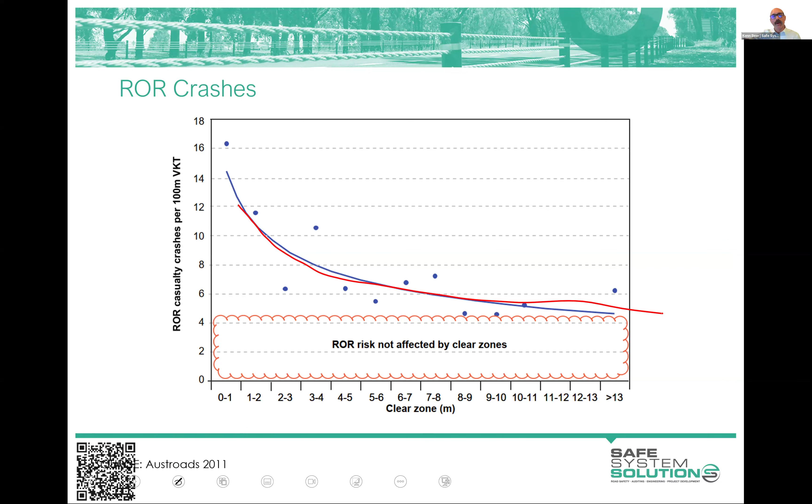But also, it doesn't actually give us the best road safety outcome, because as you clear the roadside of hazards, you reduce risk, but then it just flattens out - that's because people roll over or they go beyond anything we've cleared. So the idea of wide clear zones is often an impossibility to actually create.

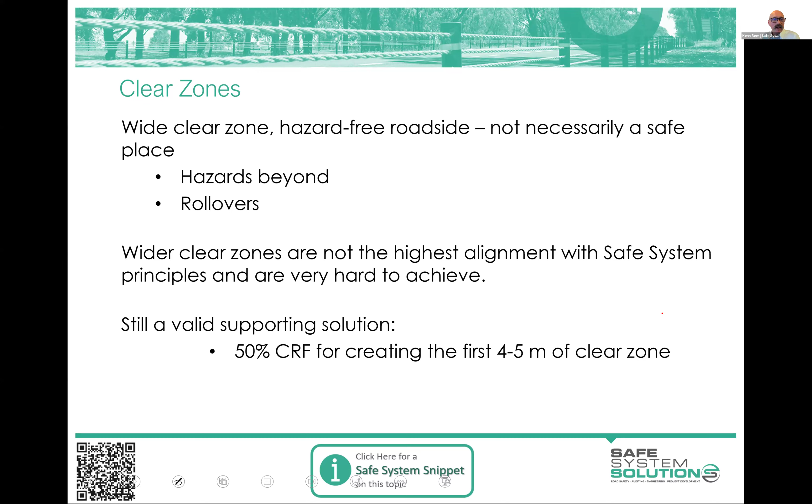They're not necessarily a safe place to be due to that rollover or going beyond it. There used to be, if you looked at the old guide, and I say old, I'm only talking like the 2021 Austroads Guide to Road Design Part 6, which is roadsides,

And that's how we'd been building roads. But it doesn't work. These roads have death and serious injury, even if they're built exactly to that standard. People leave the road, they cross the carriageway, they're going 110 kilometers an hour, they hit another vehicle. People fall asleep, they leave the road, they hit the trees. So there's something inherently not quite right about that. It requires too much of road users not making major mistakes in order to survive.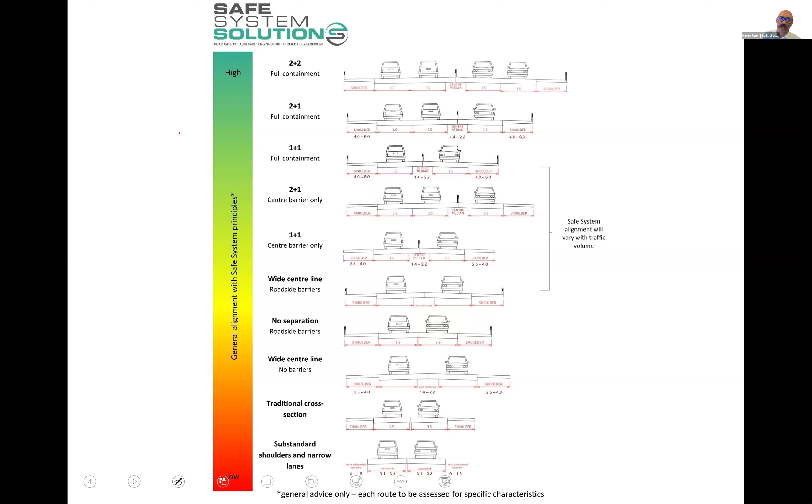I'll put some other cross sections and things, a little bit hard to see probably, but I've got star ratings there for those who know about star ratings. Like the way you can look at the energy star rating on your fridge, we can star rate a road for safety. There's an international program for doing that, the iRAP program. So we go out there, we star rate roads. You see there this big cross-section, wide median, sealed shoulders. It's a 4-star road. But to get it to a 5-star road, you actually need a smaller cross-section, it's just got to have these barrier systems.

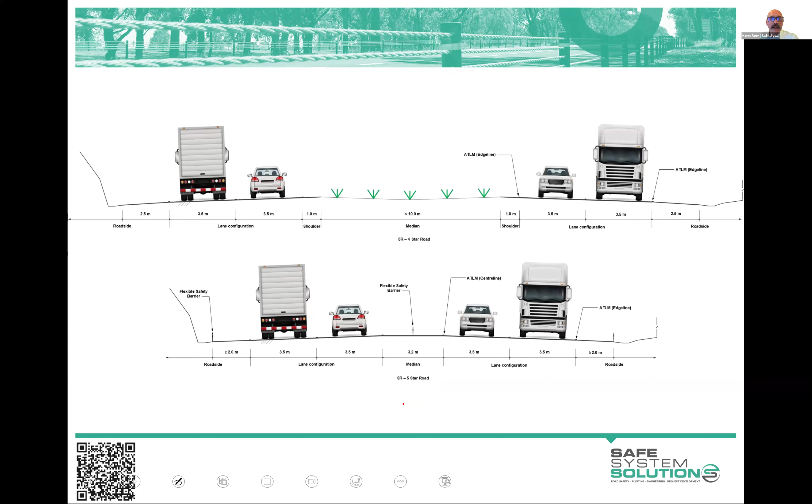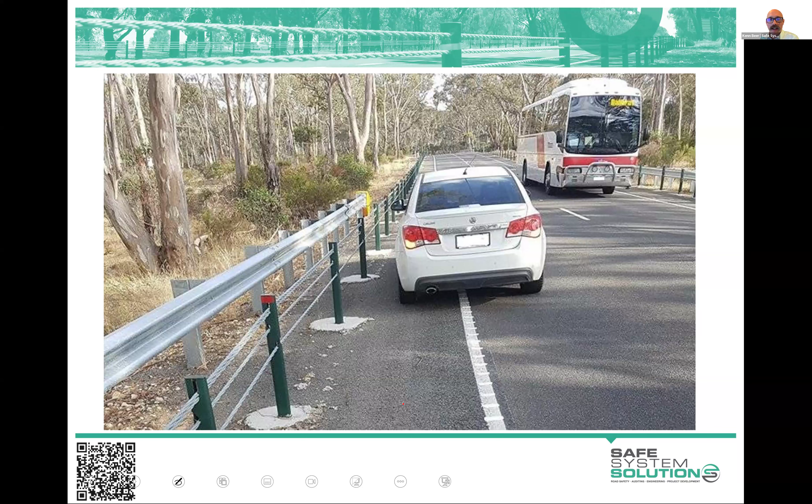And then there's quite a few more of those, which I'm not going to delve into the detail of. But there's lots and lots associated with the rollout of barrier systems. My colleague Jamie Robinson and I run a 2 or 3 day barrier design course, all the intricacies, offsets, deflection, flare rates, terminals, motorcycle protection, footings, all sorts of fun stuff. And this is a picture of some challenges around pullover areas and contiguous barrier systems and the like, just to always bear in mind.

The last thing for today's session, before we jump in and show you the assignment and give you some time to do the quiz and the assignment, I just wanted to show this other thing about thinking of energy management. I think it's a good example. This is a crash that occurred in Mildura. It was 2 in the morning or something. It was an old Ford with 4 young male passengers.

The scenario is all too familiar. They went through a roundabout. Now, we've just talked about the safety advantages of roundabouts, but they've gone through very fast. In fact, it was estimated they were traveling at 92 kilometers per hour when they hit the power pole. And you know that even 5-star vehicles striking a power pole, anything above about sort of 30 or 40 kilometers per hour are in big trouble.

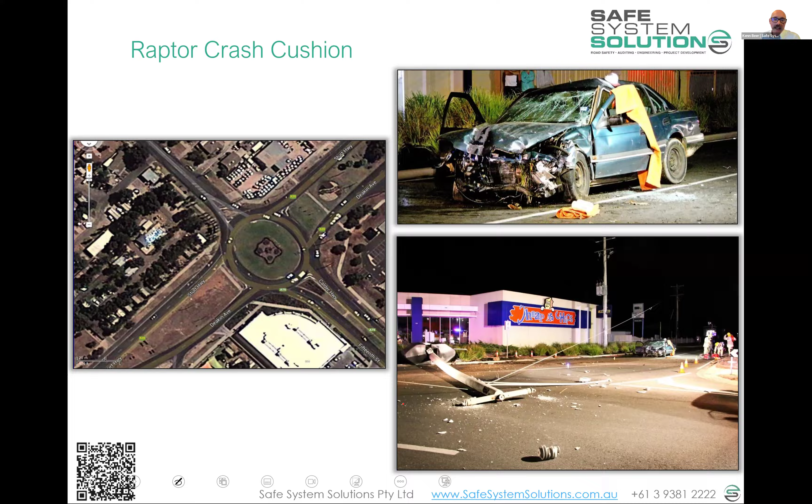92 kilometers an hour in an old car, but they all only had minor injuries. And the pole had one of these Raptor cushions. Now, I'm not trying to sell these Raptor cushions, I've got no interest in that side of things, but I think it's a really interesting demonstration of management of energy, because these things kind of act as a bit of a cushion, but they actually rotate as well, which is a really important energy management consideration. So when they're struck, they rotate and sort of try to push the vehicle along, move the energy along with it, which is a unique sort of way of trying to think about energy management.

But it's all about, again, severity. How can we lessen the severity? And I really want you to, as you go out there thinking about ways to reduce risk, think about that severity of crash.

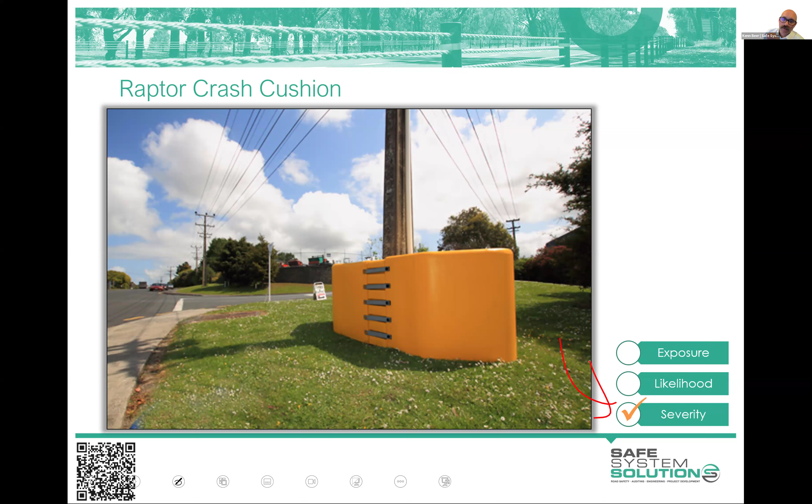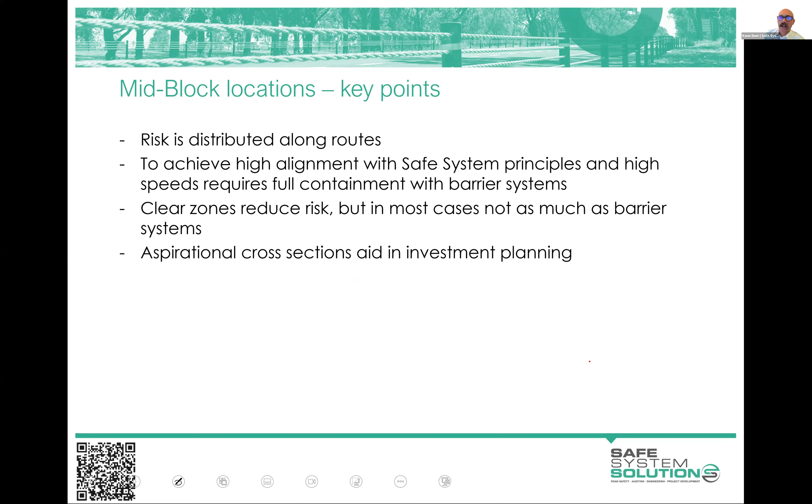And a couple of key points in there around severity, the mid-block locations, just a few things to have a look at. And I think that gets us to the point where I was going to start to hand it over to Loretta to take you through the learning management system. But I do see something's popped in on the screen.

IRAP rating doesn't change between 300 mil to 1 meter wide center line treatment. Yeah, so that's correct. There is a degree of granularity in the star rating system, it's just not that precise. So you might be able to get a very minor shift, like that might go from a 3.175 to a 3.165 or something like that. Now we don't give that precision usually, we just say that's a 3-star road, and that's also a 3-star road. So good question, though, thank you.

All right, now I can see the learning management system on screen, so that's fun. Thank you. I just wanted to point out again, I know I mentioned this on Tuesday, but under the resources tab, ensure that you're checking through those resources, really helpful. I know Ken mentioned the Raise platform sheet in there as well, so guidelines etc., so please have a look. So basically for today, what you need to do is a quiz. I'll just bring that up in a sec, won't be a moment.

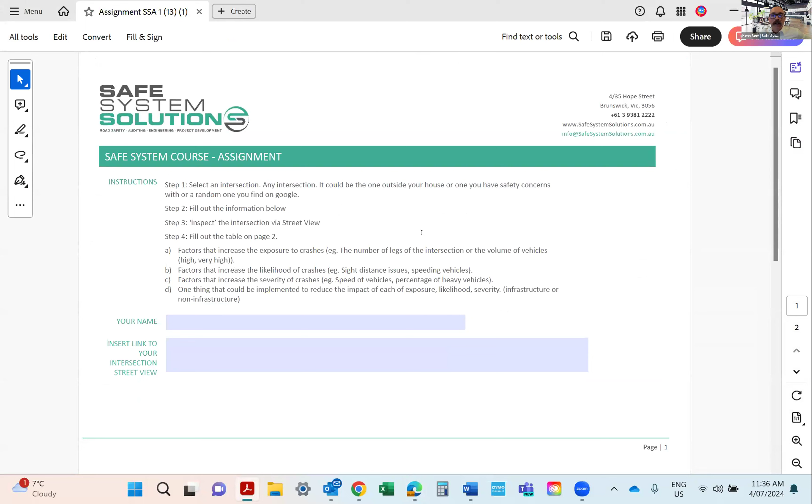Sure, yeah. Okay, so you can see there, once you've downloaded it, hopefully it's step-by-step instructions. Hopefully it's obvious, but I'm going to take you through them step by step now. You're going to select an intersection. Now this could be an intersection outside your house, it could be one you know of that you're going to go and use on Street View. It's up to you, you don't need to visit the site physically. If it is easy to do that, you can, but you can do it from Street View, whatever it is. For this assignment, the next assignment, we're going to make you actually go to a site, but this one you could do from your desk if you want.

So you're then going to fill out the name, and you put your name there, then you put the Street View link, which is our preferred, or you could just put the coordinates if you wanted, but the Street View link - so our assessors can have a look at what you looked at as well.

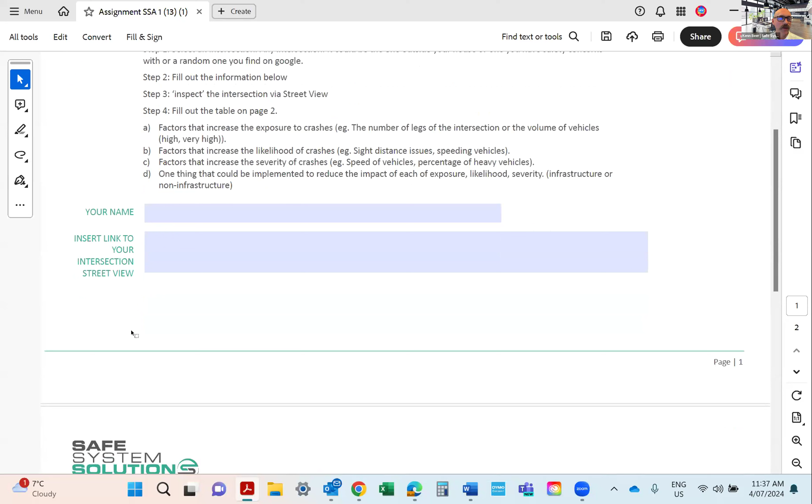Then we're going to jump down to the next table. And what we've got here are 3 columns: exposure, likelihood, and severity. And we've been practicing doing that, so hopefully you're somewhat comfortable with those. But what we want you to do is have a look at the intersection you've chosen and give us between 1 and 3 factors that increase the exposure to crashes. Now remember, when you're thinking of exposure, think a little bit about the number of people or the number of vehicles. Think like that - so what is influencing you to say this is a major arterial, this is a major connector between these areas, this is a major pedestrian desire line between the bus interchange and the shopping center.

These sorts of things are influencing the numbers. And the more you can articulate this is about the numbers, the more the markers are going to think, good, this person understands exposure. Remember, this assignment is marked basically on whether this person understands what exposure is, what likelihood is, and what severity is.

So you're going to dot point between one and three of those. Then you're going to look at the likelihood. You're going to say, okay, what factors in this intersection increase the likelihood or influence the likelihood of a crash? It could be that it's confusing, or there's bad sight distance, or the skid resistance looks bad, or there's a see-through effect, or anything like that. And you're going to put between one and three of those in.

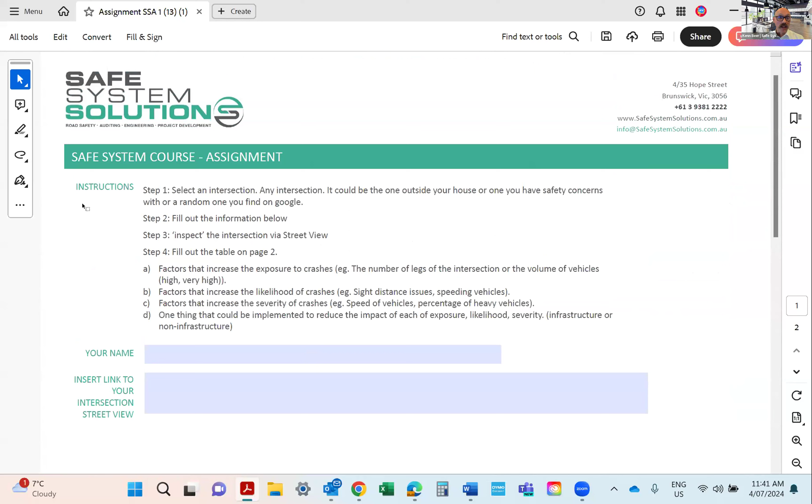Start the next session - as I said, it's Max. He'll take you through this, probably using an example and hopefully getting a volunteer to actually walk us through their site on Street View and talk about this.

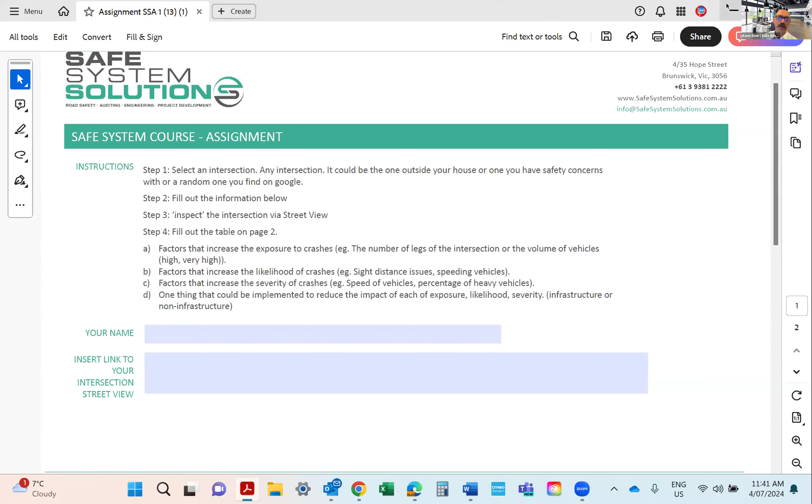Now, there's no budget - I think that just came in as a question. No budget constraints on this one. No budget constraints, no even political acceptance constraints. You just need to prove to us you understand exposure, likelihood, and severity.

You notice there that we said one thing for ideas. Some people go, like, they want to put lots and lots of ideas in. That's fine, but we're just going to read the first one, or the assessors will, so you kind of wasted your time a little bit. Just prove you understand these concepts.

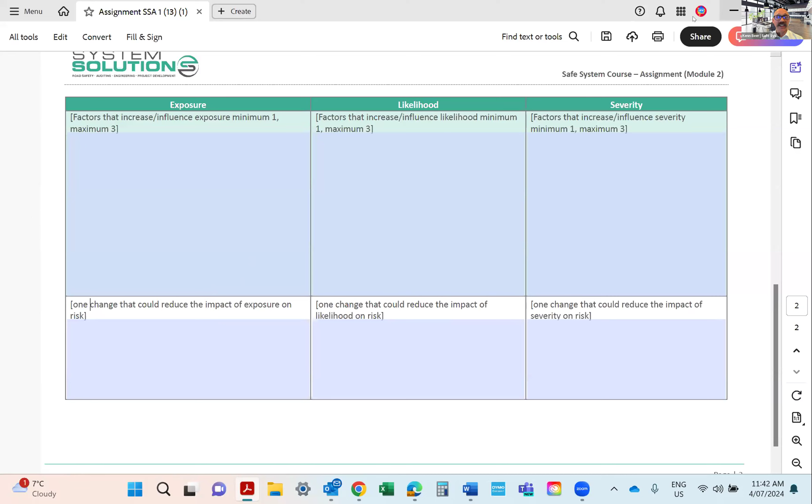Now, there's a couple of other things. You have coaching available. If you've been listening to that and you go, I don't really understand - okay, get in contact, email Loretta, say, hey, can I get some of that coaching? There you go, the training at SafeSystemSolutions.com.au. Can I organize a little half-hour meeting with one of the Safe System assessment coaches? They'll talk you through it, you could share screen, you could look at your site, you could talk these things through with them. We really want you to get your head around that.

Okay, so you're going to do that, you're going to save it, PDF it, add to submission, drop it in there. How long have they got to do this? We hope that you can get it in before the next module, so that way we have a little bit to work with in module 3. So Tuesday the 9th - of course we understand things come up, and that goes with any of the assessments throughout the course. If you do need an extension, totally fine, let us know - again, email us and we can provide an extension for you.